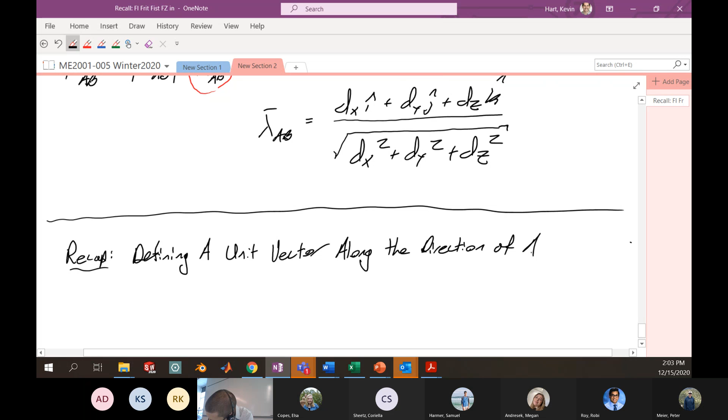All right. So this is particularly useful in 3D, and we're going to see why that is in a few minutes here. But generally, if you have some force in 3D, let's just, for now, write it in sort of an algebraic form. If you have a force in 3 dimensions, then that force can be written as the magnitude of that force, which we usually denote with these vertical brackets, multiplied by the unit vector associated with that force direction, which we call lambda. So here's magnitude, and this is your direction.

All right. So pictorially, we sort of saw this as something like the following. We have some vector out in space. Here's our F. And we may have a unit vector that's in the direction of that force, which we're calling lambda. And if that force has a magnitude of F, then this is a good general definition for how we might define that force in a 3-dimensional space. And we more or less had 2 ways to define this unit vector in the direction of the force. All right, so we're sort of defining this in 2 ways.

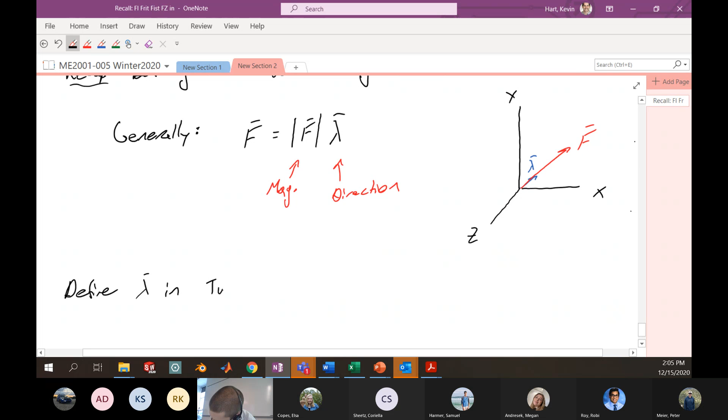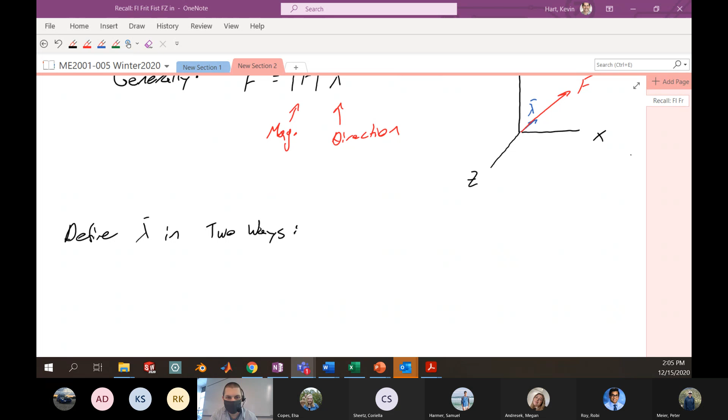All right. Looks like I got another note here. Did we fix it? How are we doing, Arthur? Looks like he's still struggling maybe.

All right, we can define this unit vector in two ways. One is with angles between force and x, y, z axes. And we found that generally to be like lambda is cosine theta x i hat plus cosine theta y j hat plus cosine theta z k hat.

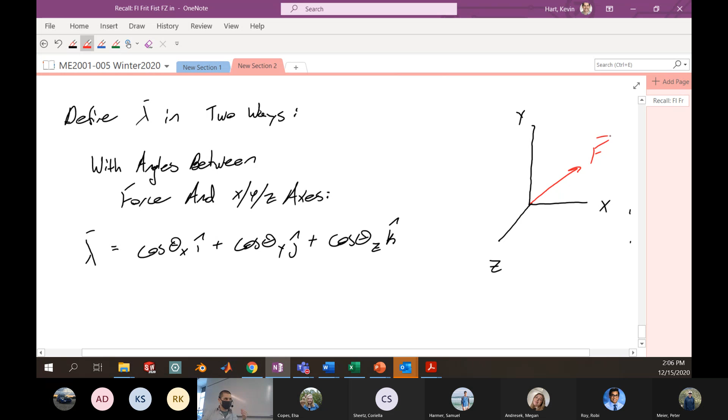And the idea there is if we're out in space somewhere, we have our force, and we happen to know the angle that exists between that force and the various axes. This angle here, we call the angle theta x. The angle between the y-axis and the force F, we call theta y. And the angle between the z-axis and the force, we call the angle theta z. All right. So we could define our unit vector lambda using those directional cosines.

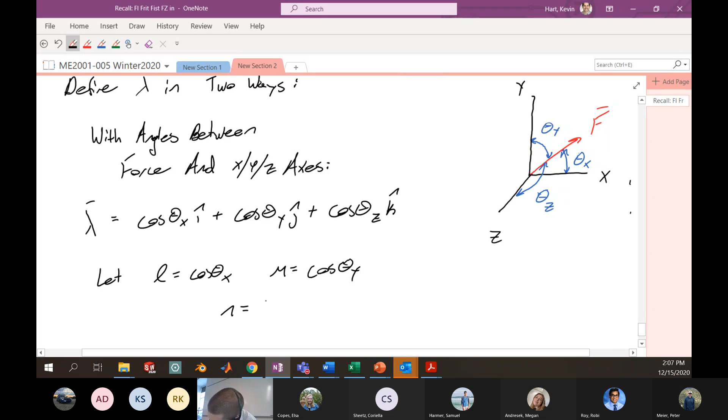And you may see this as L, M, and N. And we define then our unit vector if we have those special little guys, which we call our direction cosines. Then we can say that this lambda is simply L i hat plus M j hat plus N k hat. All right, that's our unit vector in the direction of the force, given known angles between the force and the various directions of the coordinate axis. So that is one way which we might define this unit vector lambda.

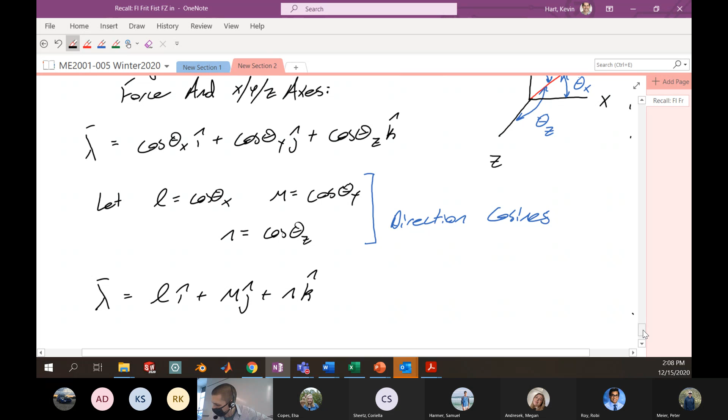Another method is by defining the unit vector between 2 points in space. So you also might define this unit vector between 2 points in space. Okay. So here we are with x, y, and z. And let's say we have some point here, which is P1. And we have a force that exists between P1 and some other point, P2. And let's say that there is some distance between these guys in the x and the y and the z directions. All right. We call this distance in the x, let's call it dx. The distance in the y, we call dy, and then the distance in the z, we call dz.

So if P1 is at location x1, y1, z1, and P2 at location x2, y2, z2, then these general distances between these 2 points we might label as dx, which we say is something like x2 minus x1, the difference between the x points. Our distance that we travel in y is the distance between the y points. And the distance that we travel in z is the distance between the z points. Okay.

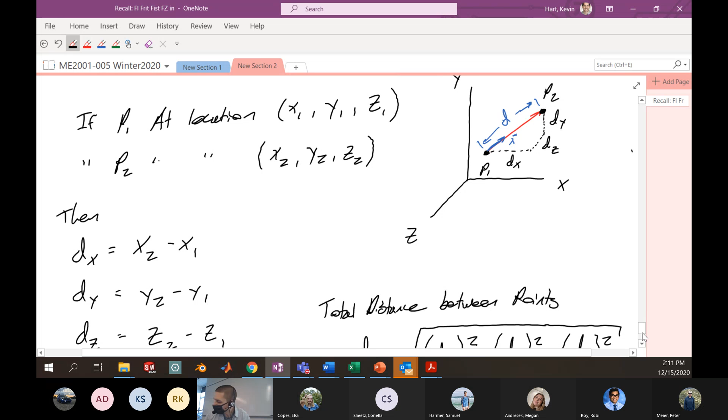Okay, I'm not after that total distance, right? What I'm after is a unit vector in the direction of this force. So I'm more or less after, what is this unit vector lambda? That's really what I want, okay? So we showed last time that if you generally know the distances between these 2 points, and you can resolve that, the vector lambda is equal to the distance vector between points divided by the total distance between them.

All right. So we could define a distance vector from like point 1 to point 2 using the components of the various distances that we have in x, y, and z. So this is sort of in English here, what I've written on the left. But in math, this would be like the distance I travel in x in the i direction, plus the distance I travel in y in the j direction, plus the distance I travel in z in the k direction, normalized by this total distance d. This would give me a unit vector in the direction of that particular force.

So this is one other method that we can utilize. And it's this method that we're going to focus in on today. And I will show you why this method is particularly useful. It has a lot of application in real systems and real analysis. And we will look at an example now.

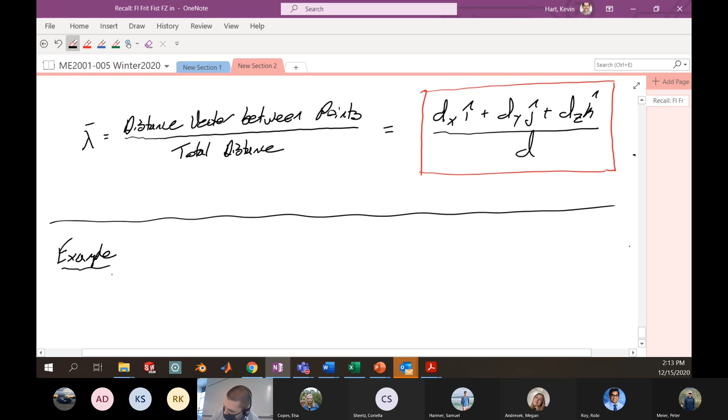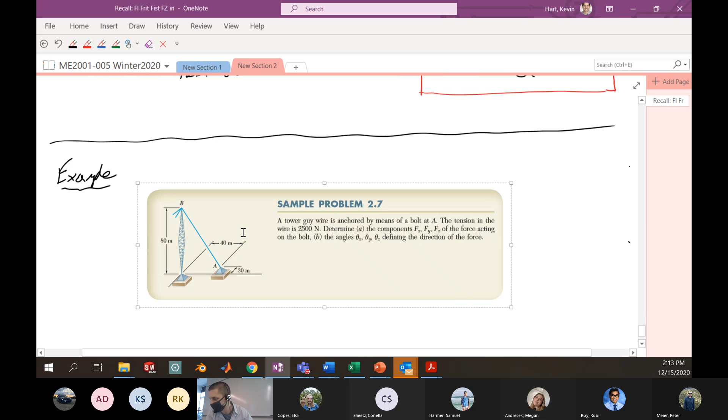Okay. And I sort of brought this example in last time, but I'll actually give you some time to talk and sort of write it down this time. So here we have a tower, and we have a guy wire that's helping to hold the tower in place. One of the wires of the tower is anchored at point A, and we're told that the tension in that wire is 2,500 newtons. I want to determine the components of the force that act on that particular bolt at A, and then I want to know the angles that define that particular force.

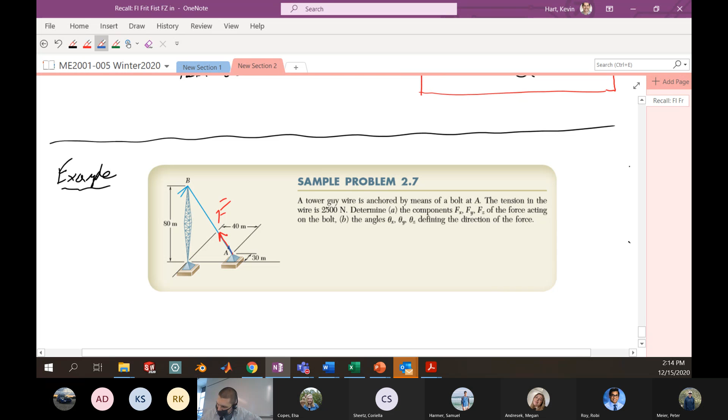So here, this is more or less our force of interest, F. As part of this problem, we're going to define a unit vector in the direction of that force, which we'll call lambda. This will help us sort of define this particular force. Give you another minute or so to copy down.

Okay. So let's work through this. We want to find the components of the force in the various directions. Here, that's kind of part A of the problem. And also, for part B of the problem, the angles that this guy wire makes with the coordinate axis. All right, so something that we're given: the magnitude of that force in this particular wire is 2,500 newtons. So that's nice.

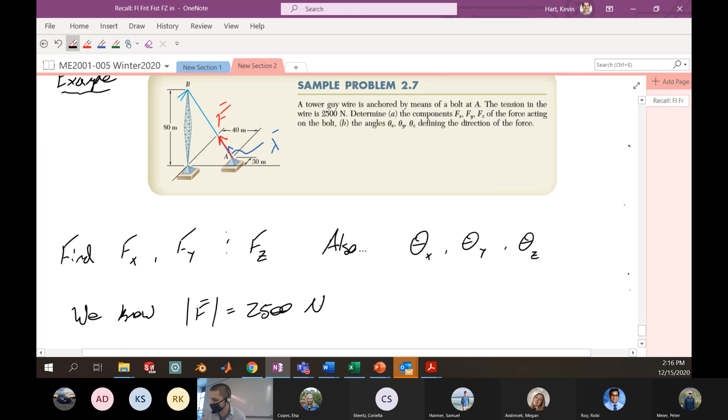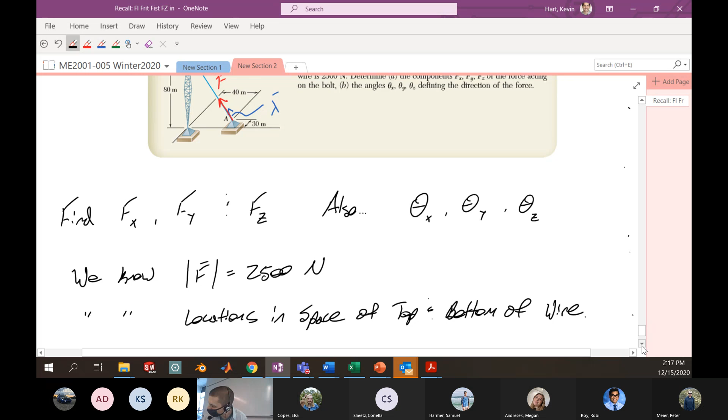We also know locations in space of top and bottom of wire. Okay? So with what we just talked about, defining unit vectors in space with two known points, we can do that here. All right, so I want to get to my force vector F, which we know is the magnitude of F multiplied by a unit vector in the direction of that force. The magnitude of the force I have, so that's nice to know. And the location in space of the top and the bottom wire, I will use to help me define this unit vector lambda. Right? That's what I'm after here.

Okay. So let's define a new vector between points A and B. I'm going to call this distance vector AB with a bar over it. Distance vector AB. This distance vector is just going to be a vector that has some component in x distance-wise, some component in y distance-wise, and some component in z distance-wise. So let's say that this is dx in i, this is dy in j, and this is dz in k. The distance along each one of the general directions makes up the full distance vector AB.

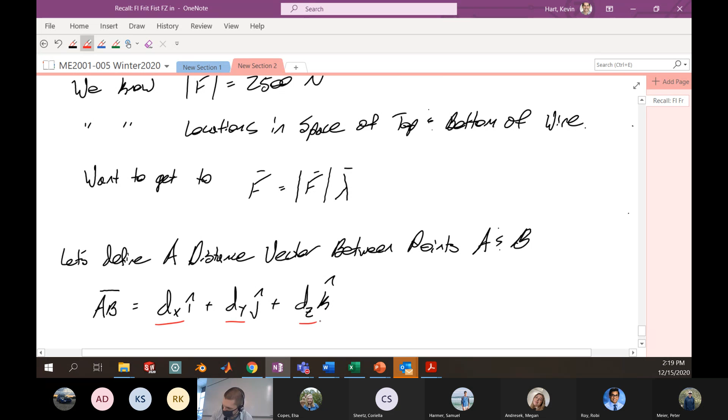All right. So let's go back up to my image now and see if we can use the picture to help us define this dx, dy, and dz. Back to my picture here. I don't really have a coordinate axis, so it would be useful to define a coordinate axis. Let's go with the traditional coordinate axis that we used in this class, which is x here, y up, and z kind of coming out of the page this direction. So usually how we do it in this class.

And now if I think about my distance vector, which is the vector that's moving from A to B, I've got to think about moving from A to B and how far in each one of the general directions I move. So if I go from A to B, how far I have to go in the x direction, well, I'm moving a negative 40 to go from A to B. I'm going backwards 40 meters. So here, this dx is negative 40 meters. I'm going backwards to get to B from A.

If I'm going from A to B, I've got to go up 80 in the y. So this dy is going to be positive 80 meters. If I think about going from A to B, I've got to move generally this direction in z to get to point B. So it'll be a positive 30 meters. That's how I'm defining my distance vector to go from point A, which is at the bottom, to point B. It's kind of important to make sure that we're consistent with our directions there.

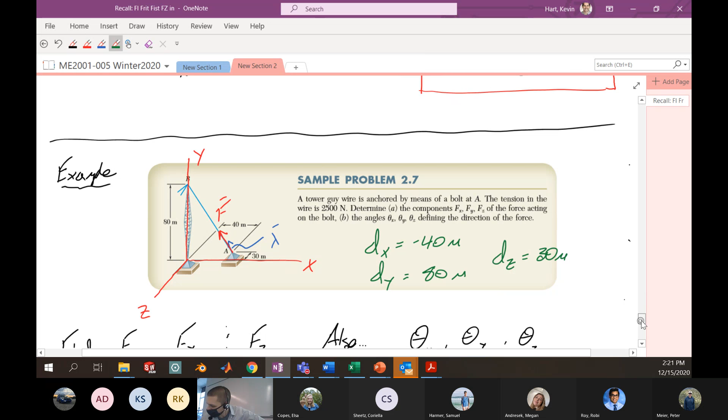All right. So generally this distance vector AB then will be negative 40 meters i plus 80 meters j plus 30 meters k.

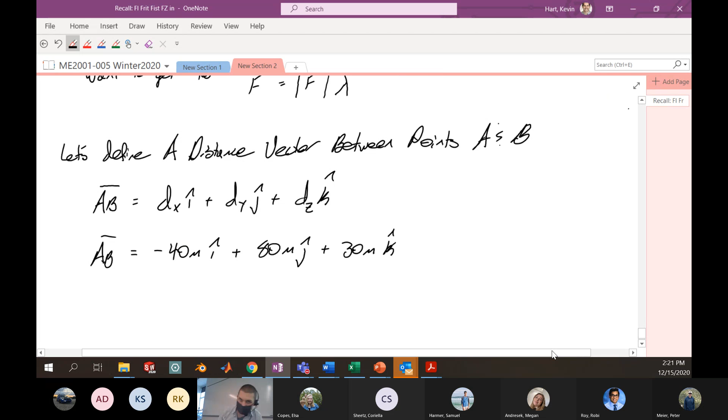All right. Now what I ultimately want is the unit vector that sort of points in that direction. This is going to help me define the direction of the force F. And so remember, a unit vector has a magnitude of 1. So I need to normalize this vector that I've created by the actual total distance between those 2 points.

So I want the magnitude of AB, which is like my total distance between the 2 points. Here, that's going to be the square root of the sum of the squares of the individual components. Okay. So this is like negative 40 squared plus 80 squared plus 30 squared. Here, units are meters. Okay. So the total distance between points A and B, here, calculate this 94.3 meters.

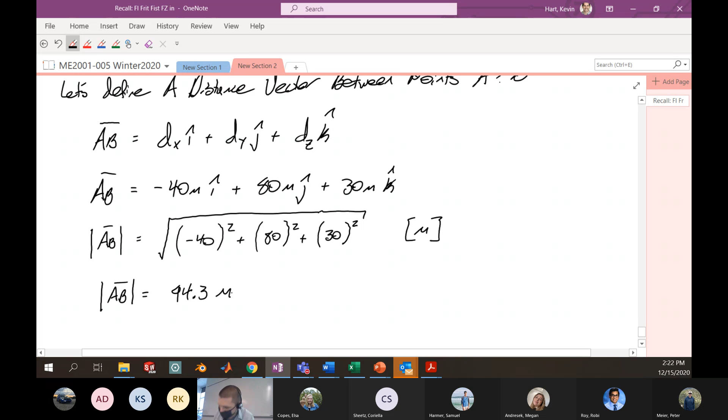All right. So then a unit vector along AB, which is the same thing as a unit vector along this force here of the wire, is whatever the vector is. We know that we have a distance vector that points from A to B, divided by its magnitude. Okay. This will give me a vector of magnitude 1, generally in the direction of AB.

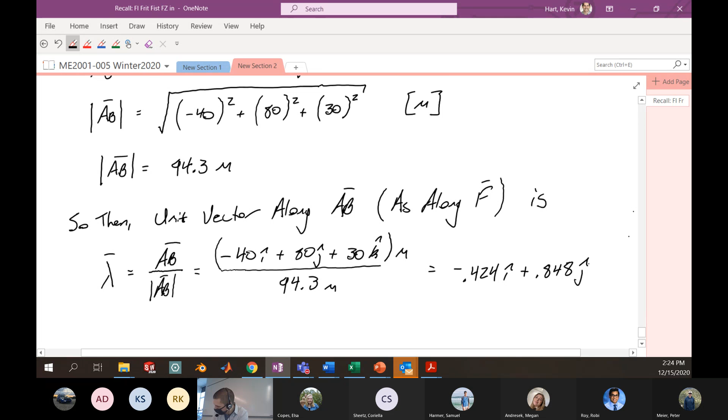Okay. So I do that here, I will get negative 40 I hat plus 80 J hat plus 30 K hat, all divided by the total distance between the 2 points, which I calculated as 94.3 meters. Here, this top's also in meters. And if I work this out, I can get some unit vector here that is sort of some percentage in each general direction. And I could find this to be negative 0.424 I hat plus 0.848 J hat plus 0.318 K hat.

So this is a nice, useful sort of intermediate finding for us in this problem. It is the unit vector that points towards B from A. Okay, I've got to go backwards some amount in I. I've got to go up a pretty good amount in J, and I've got to go forward some amount in K. Right? And if you look at the leading coefficients here, you get an idea for basically what percentage of the total force is in the various directions.

So we know that our force has a total magnitude of 2,500 newtons. 84.8% of that total force is in Y. We have 31.8% of that in Z, and we have 42.4% of that in negative I. So we get a general feel for how much this force is acting in each one of the 3 directions.

Okay, so finally we can write our force which acts along that same line. I know my magnitude of my force is 2,500 newtons. It's given in the problem. And I'm going to multiply this by my unit vector that's in the direction of that force.

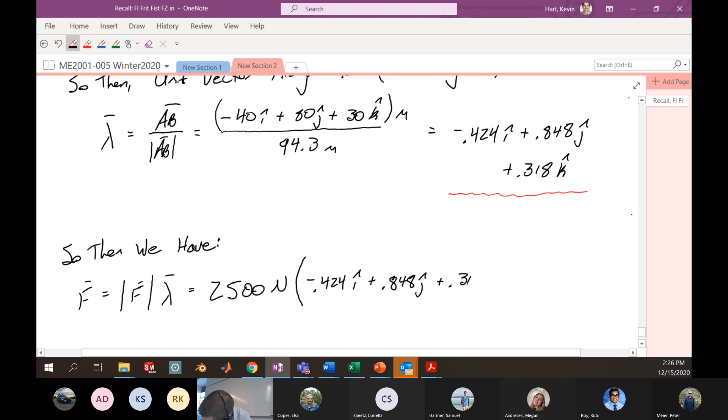Okay, so I do that. And I distribute my 2,500 across all of those different components. I'll have negative 1060 I plus 2120 J plus 795 K. All this has units of newtons. So this is how you might represent the force between A and B, given 2 points along the line of action of that force and the total magnitude of that force in that wire.

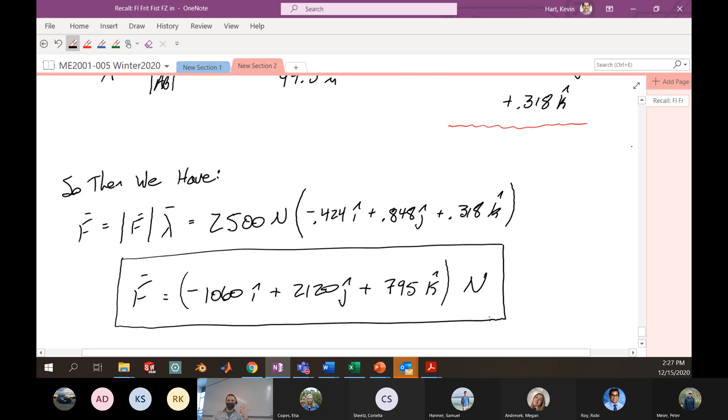Back to the original problem, we want the components Fx, Fy, Fz. It's pretty easy to see sort of from our analysis here what those values are. You could sort of see just directly that Fx is negative 1060, Fy is 2120, and Fz is 795, but let's just be explicit about it.

The magnitude of the force in the x direction from that wire is negative 1060 newtons. The force in the y direction, 2120 newtons. And the component of the force on that wire in the z direction, 795 newtons. So if we wanted to answer the question very explicitly and very directly, this would, I guess, be the best answer that you could give. Okay. So that's kind of part A of the problem. So part A, check mark. Good for us. Question.

The question is, if I gave you something like this on the exam, how would I want the answer? If I gave you a problem that looked like this on the exam, and you gave me this, I would give you full credit. On the exam, I'll be very explicit about sort of what I'm asking for. I'll sort of tell you how I want the format. It's like kind of what I do for the homework problems.

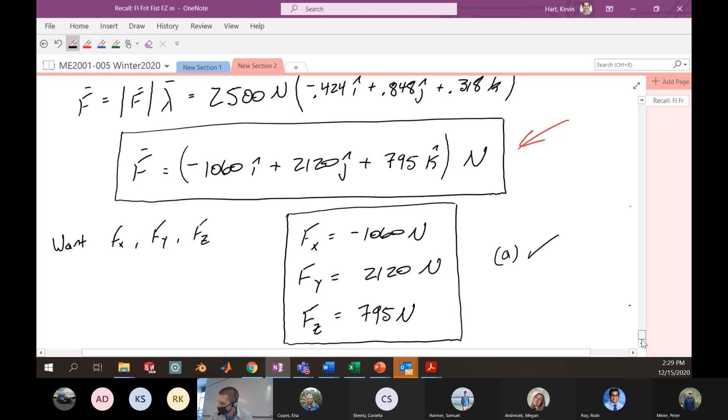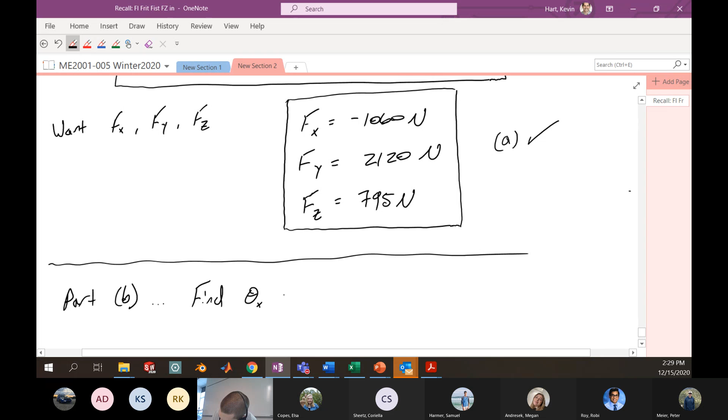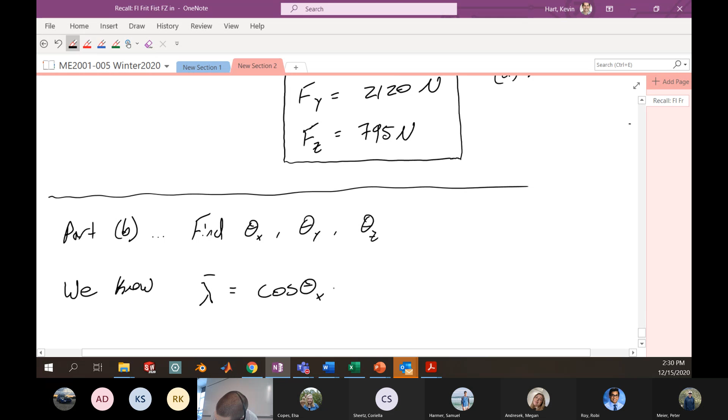Where we want to find these angles that the force makes with these various axes. Okay, well, given our unit vector lambda, this is pretty easy to find. One of our definitions of lambda was not only could we define it between two different points, but we could also define it using our direction cosines. So remember we had something like lambda is cosine theta x i hat plus cosine theta y j hat plus cosine theta z k hat.

But we've already sort of solved for this, and we know what lambda is already. We have it previously from the problem. So all we need to do is more or less equate the coefficients in front of each one of the vectors, and we're on our way.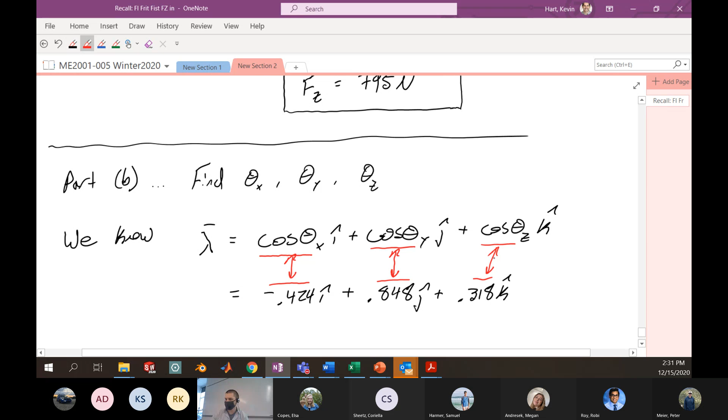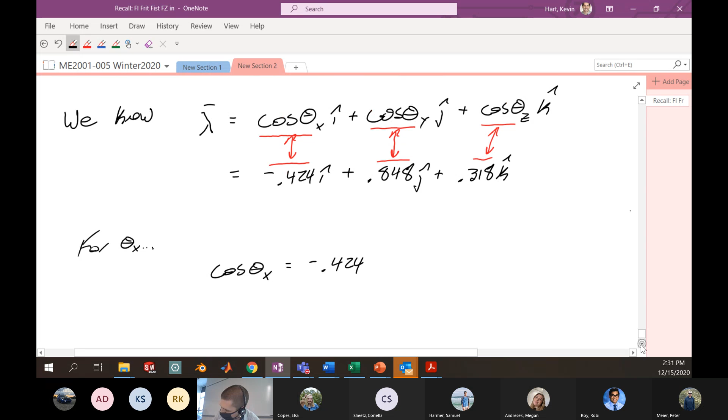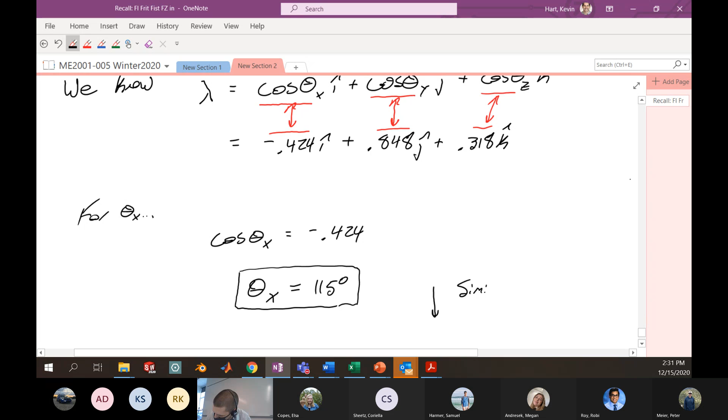Okay. So for theta x, you're going to have something like cosine theta x is equal to negative 0.424. Just do the inverse cosine, and you can find your angle theta x. Here it's going to be 115 degrees. I'll just say similar for theta y and theta z. And you could find that, same method, theta y is going to be 32 degrees, and theta z, 71.5 degrees.

Okay. That's kind of using all the tricks in our tool bag right now. How are we doing on this? Questions on this problem?

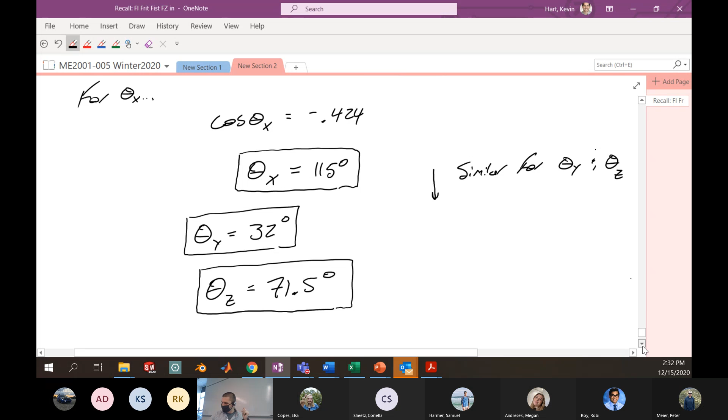Wow, I got a thumbs up. Any questions from the online world in the chat? I don't know if we still have Arthur or not. Oh, he's still here. Must be able to hear me now. All right, Kanan also gave me a thumbs up. Sweet, man. Now I know how those streamers feel where they're always getting the donations and the bits and stuff. And you're like, yeah, cool. There's no in-person donate button. Where's the donate button? Okay.

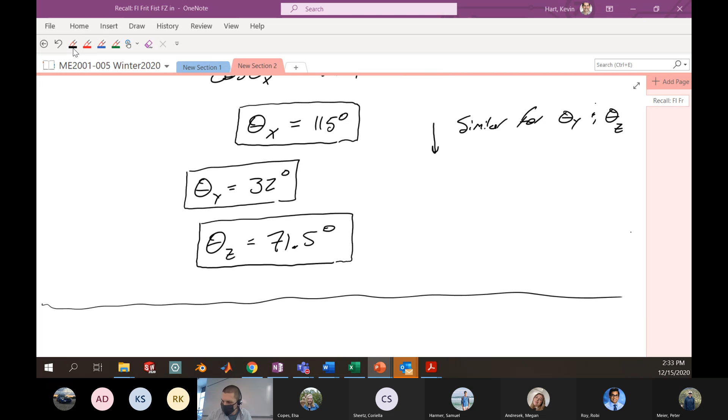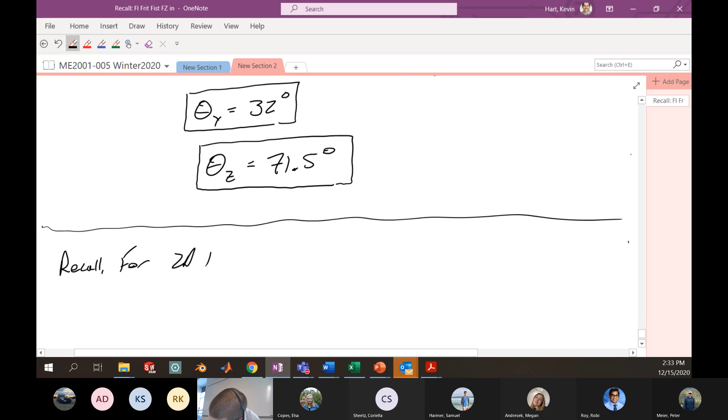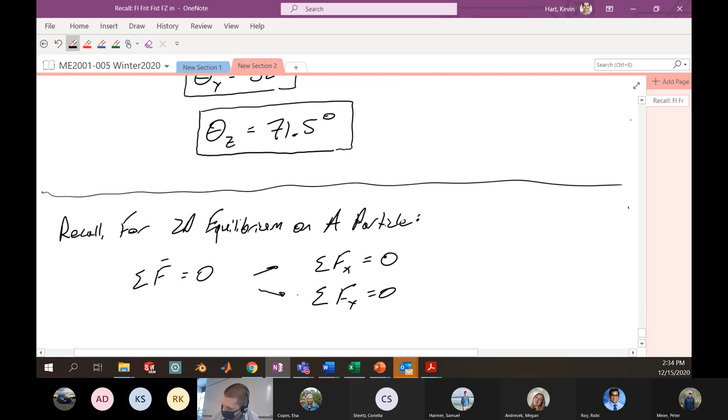So that's defining a unit vector along the direction of a force. The last thing I want to highlight quickly and go over is your 3D particle equilibrium. We talked about 2D equilibrium already. Now let's put a cap on 3D equilibrium. It's going to be pretty straightforward. So let's remember for 2D equilibrium on a particle, we had that the sum of the forces on that particle had to be equal to 0. That was our mandatory definition. And in 2D, that splits to the sum of the forces in the x direction equal to 0, and the sum of the forces in the y direction equal to 0. This is your 2D setup, just like the planar statics that we first started with in this class.

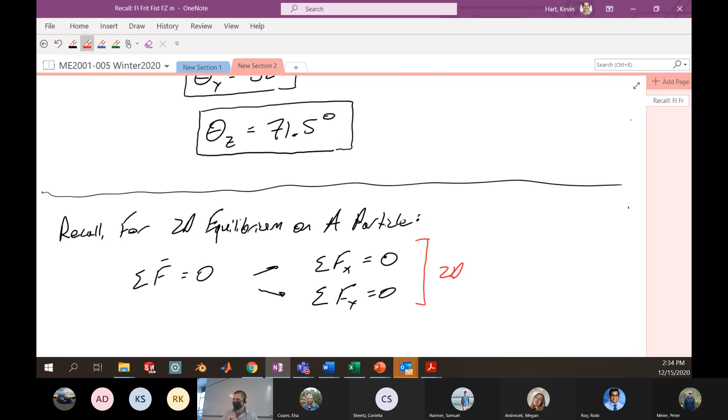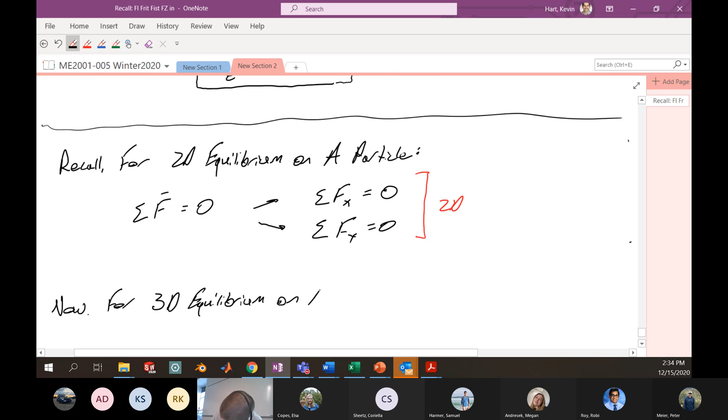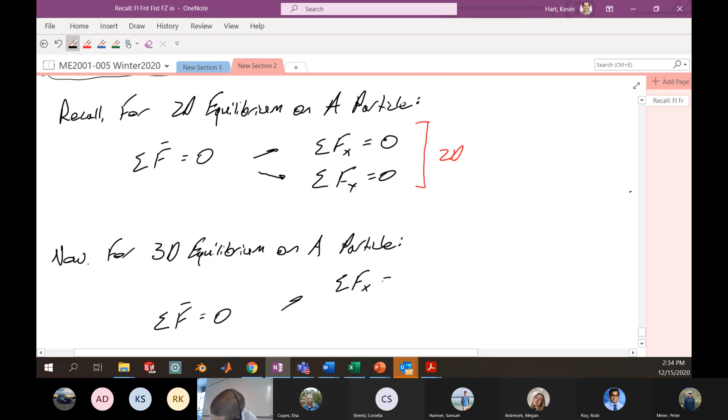And we're going to add to this for 3D. I think we can see where this is going. You have the same general idea, that the sum of the forces acting on that particle is equal to 0. But now instead of just 2 independent directions, x and y, we're going to have 3 independent directions. Still have to enforce that the sum of the forces in x equals 0, the sum of the forces in y is 0, but now we will also enforce that the sum of the forces in z is equal to 0. So this is what it means to be in 3D equilibrium.

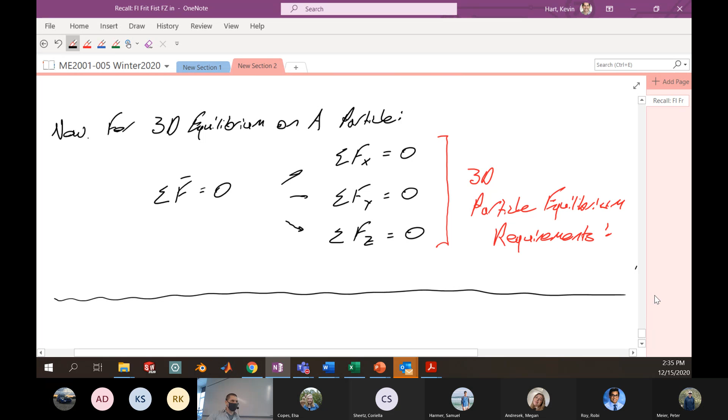Okay, so it's 3 independent equations now instead of 2. So let's look at a problem where we're doing a full-blown 3D analysis, and we're going to do a couple of these problems over the next few days. I did put in your notes a problem-solving strategy for these 3D equilibrium problems. I'll pull that up here quickly. If you want to make a note that this exists in your notes, might be nice.

If you're looking at a three-dimensional equilibrium problem, it's usually a bunch of forces in 3D space that are acting on a particle, something like what you see in the bottom right there. And then I stole this little figure from your book. I'm such a thief.

Ideally, you create a 3D free body diagram from the space diagram. Then you give yourself an XYZ coordinate system if the problem doesn't already have one. Then you want to establish unit vectors along each one of these particular forces using either those cosine relationships that we've seen before, or by establishing a unit vector between two different points in space.

Okay. Then use your equilibrium relationships to solve. You'll have all the forces in terms of I, J, and K. And so then set all of the I components, add them together, set it equal to 0. All the J components, add them together, set them to 0. All the K components, add them together, set it equal to 0.

My macaroni and cheese came up and attacked me there. I had mac and cheese for lunch. It was delicious. Never too old for mac and cheese.

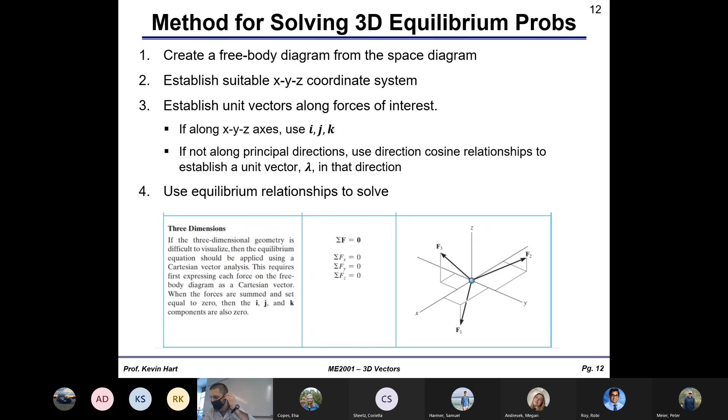All right. So that's the general strategy. Come back to this slide if you're kind of stuck on any of those 3D problems. So we're going to tackle this problem next. You've got a 40-pound crate held in equilibrium by a cabling system like you see there. We want to determine the magnitude of the tension force in each particular cable. Sweet. So do your best with that figure. I'll give you a couple minutes maybe, because it's going to take a while to define all the dimensions here.

Yeah, you're talking about this dimension here? Yeah, this is 8 feet between D and the middle of the point of intersection between B and C. So B and C are at the same height, and that height is 8 feet above this x-axis. This 8 foot is purely in the Z direction, and that 8 feet is common between point B and point C in the Z direction. You know, it's sometimes hard to interpret these 3D images. You will get better at it though.

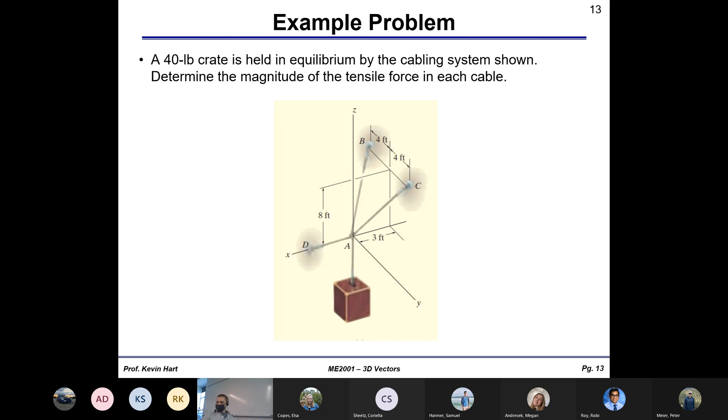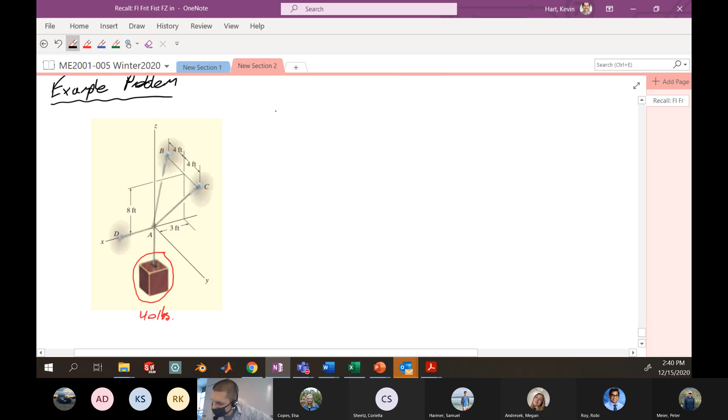Okay, I'm going to take this picture into the writing pad. And let's do our best. I'm told that this crate here in the problem is 40 pounds. All right. So I want to find tensions in all wires. Okay. I'm also told that this is in equilibrium. I think that's kind of intuitive. All right. So let's attack this problem.

All problems usually want to start with a free body diagram. And obviously, in this particular problem, it's pretty easy to understand that our point of interest is point A. We've got all these forces acting on point A and coming together to have our equilibrium held at A. So here's our free body diagram about point A. I'm going to make a spherical cut about point A. So I'm isolating point A here, and I'm going to be cutting through 4 different cables. I cut through this cable here, one here, one here, and one here. So in my free body diagram, I'm going to need to include 4 forces that are acting at A.

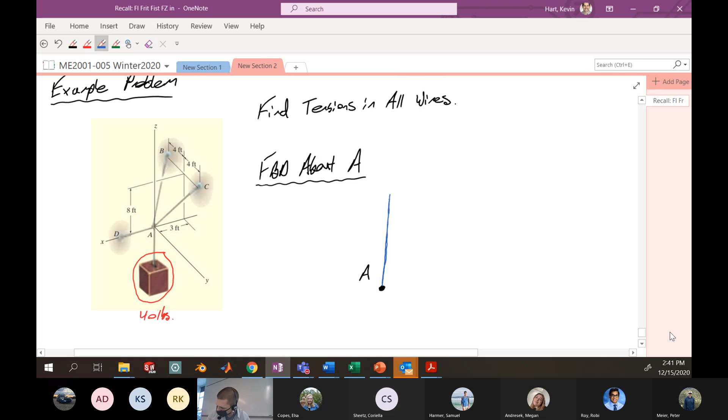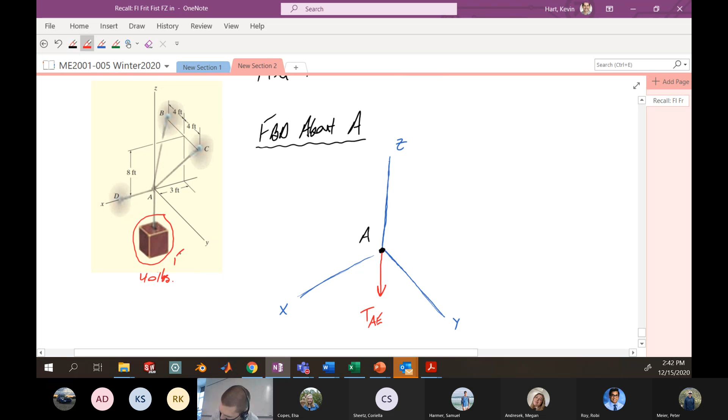Okay. So here's my point A. Let's put our coordinate system on here straight away. We'll just try to keep to the image as best as we can. So here's X, here's Y, and here is Z. We'll draw our forces in here. The first one I'll label as the tension in wire A. Let's call this T AE, or maybe we label this crate as point E. And we know that this is just going to be the weight of the piece, which we're given as 40 pounds. So I'm just going to put that straight away.

I've got this rope acting here on the x-axis. So let's include that particular force. Here, maybe we call this the tension in AD. It's the magnitude of that force. And then we've got these two here, AC and AB, that are acting. We'll do our best to draw those in space as well. So AB acts a little bit backwards, moving in the negative X direction slightly. And then we have AC that's coming out at us a little bit in the positive X direction. And so here, TAC. Okay. So those are our particular tensions, right?

Now, we need to do an analysis, and we know that this is in equilibrium. So since it's in equilibrium, the sum of the forces here is going to be equal to 0. And this is how we're going to have to solve this problem. Remember in 3D, this is going to give us sum of the forces X equals 0, sum of the forces Y equals 0, sum of the forces Z equals 0. And this is a set of 3 independent equations.

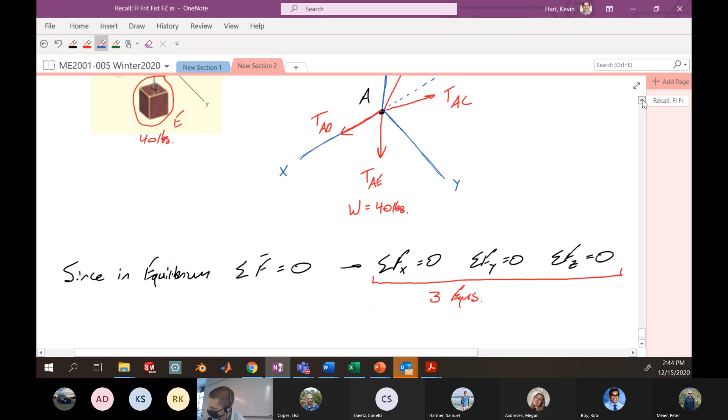Okay. And if you notice in our problem here, we actually have 3 unknowns: tension in AD, tension in AC, and the tension in AB. So we'll use these 3 equations, sum of the forces X, sum of the forces Y, sum of the forces Z, to give us our tensions in the 3 particular cables. All right.

First, and I think most obviously, is just dealing with this particular guy right here. So first, my force that exists in AE. The force in AE is the tension in AE in this negative Z direction. And we know this to just be the weight of this object in the negative direction. So my force acting between point A and the crate is the weight of the crate, 40 pounds. And this is acting in negative K hat. So here, negative 40 K hat pounds.

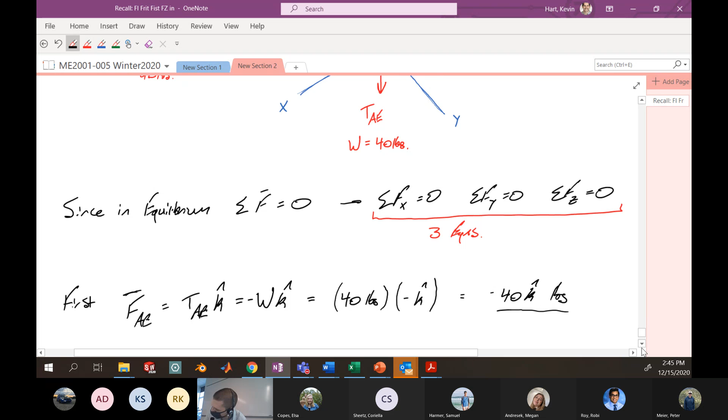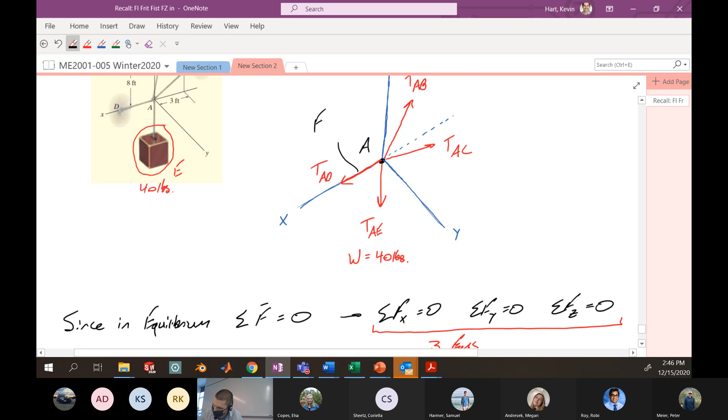So that would be like the force vector that exists in that cable that's basically holding up the crate or holding up that block. All right, so that's pretty easy to understand. Also pretty easy to understand is what's going on with this particular force here. We label this as force AD. I can see that the entire tension of this particular guy is in just the x direction, so that would be in the I hat direction.

So also, we have that the force that's acting in AD is the tension, TAD, whatever the magnitude of that tension is, in the I hat direction. You see that it's purely in the x direction, so we'll say that that full tension is in the I direction. Okay.

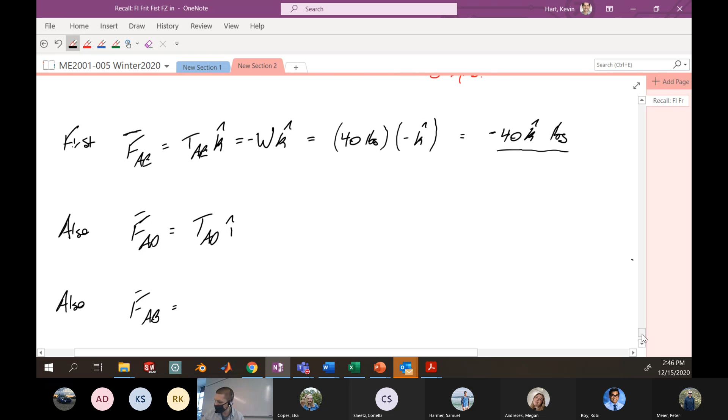We also know that the force AB, if we're representing this guy up here as a force, the force that's acting at this particular point is the magnitude of that force, which we're calling the tension AB, in the direction of that force, which we're now going to assign a unit vector, lambda AB. So FAB is the tension in AB multiplied by the unit vector in that direction. So this is the magnitude of my force along that line, and this is the direction of my force that's acting.

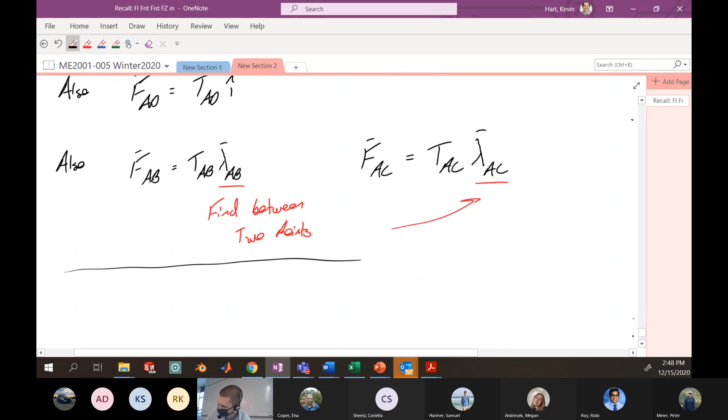Same thing with the force in the rope at AC. It is whatever the tension is in that particular rope, magnitude of that force, in the direction of that rope, lambda AC. So we're going to get these particular unit vectors here and here using our 2-point unit vector method. We'll say find between 2 points. Okay, same with this guy over here. So let's do that. So here, lambda AB.

Remember, this is the distance in the x direction plus the distance in the y direction plus the distance in z in the k direction, all divided by the magnitude of the distance between the two. Okay, so we need to define the travel distance in x, the travel distance in y, and the travel distance in z to work through this problem appropriately, defining this unit vector. Right?

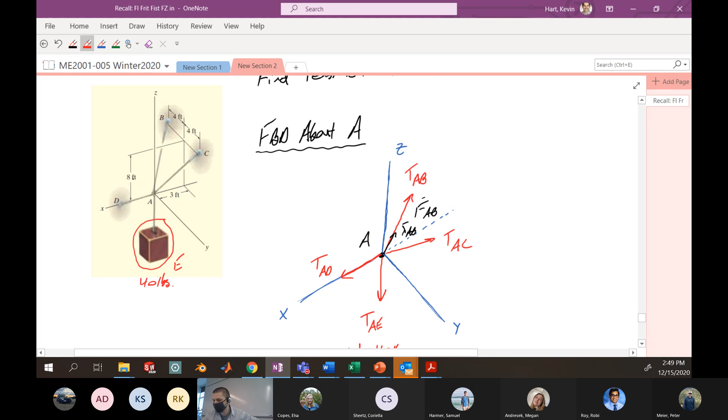Go up to my figure here. Here's point B. Here's point A. If I'm arriving at B from A, I have to go backwards 3 in x, backwards 4 in y, and up 8 in z. So I'll have -3 in x, -4 in y, and +8 in z. So if I want to set up my unit vector appropriately, this will be -3i minus 4j plus 8k. Units here are feet.

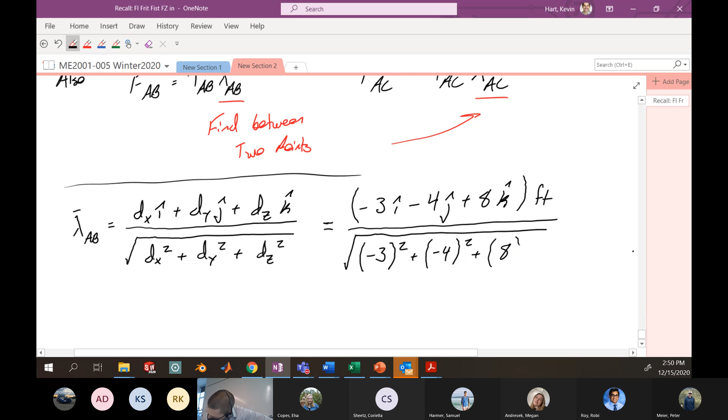All divided by the magnitude of the distance between these guys: square root of -3 squared plus -4 squared plus 8 squared. Units in the denominator also feet. You can work this out. You'll have a unit vector of negative 0.318 I hat, so back slightly in x, minus 0.424 j hat, backwards slightly in y, plus 0.848 k hat. And this would be my unit vector that points from A to B, lambda AB.